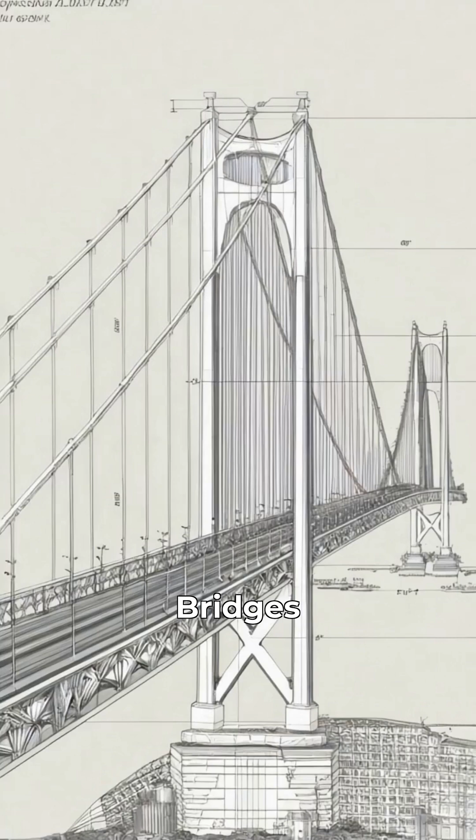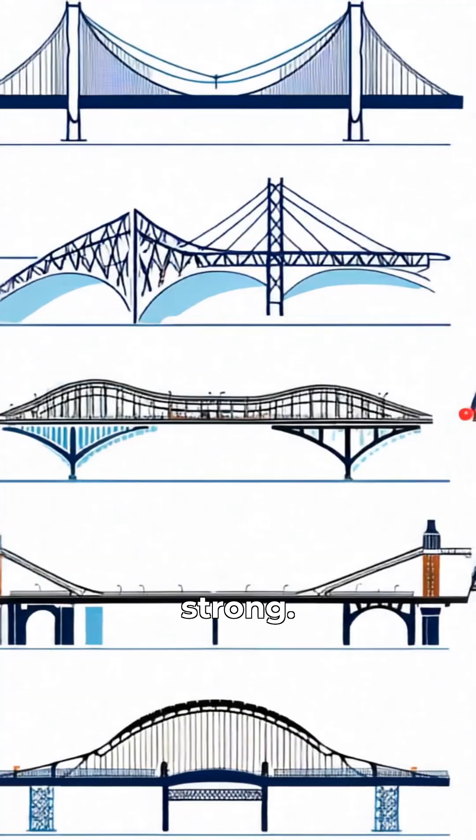Bridges help us cross rivers, valleys, and even oceans. But did you know there are many different types of bridges? Each one is designed for a specific purpose, using unique engineering techniques to stand strong. Let's take a look at the world of bridges.

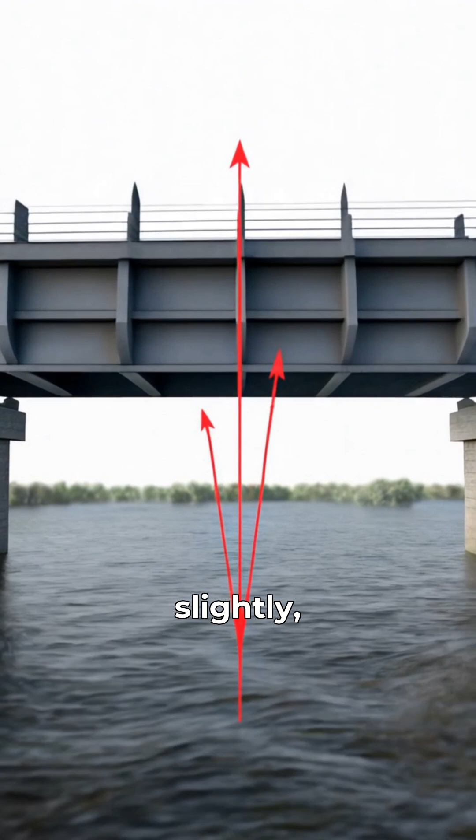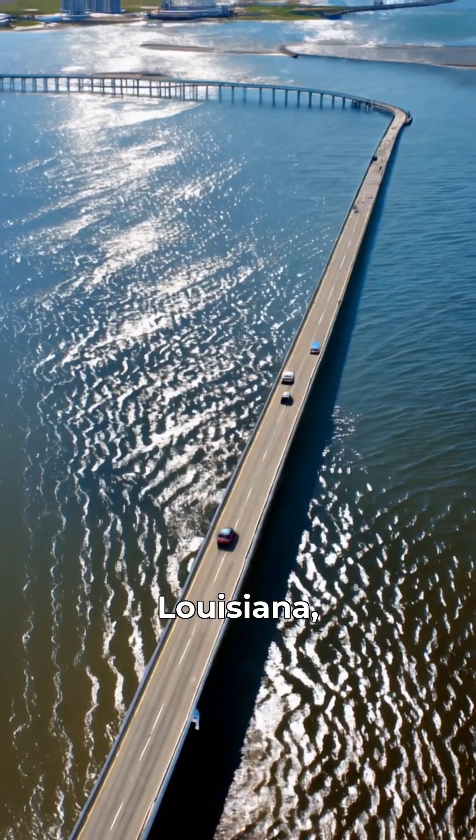The beam bridge is one of the simplest types of bridges. It's made of a horizontal beam supported at each end. When weight is applied, the beam bends slightly, distributing the load to the supports. Beam bridges are best for short spans and are commonly used for small streams or highways. An example of a beam bridge is the Lake Pontchartrain Causeway in Louisiana, which stretches for nearly 24 miles.

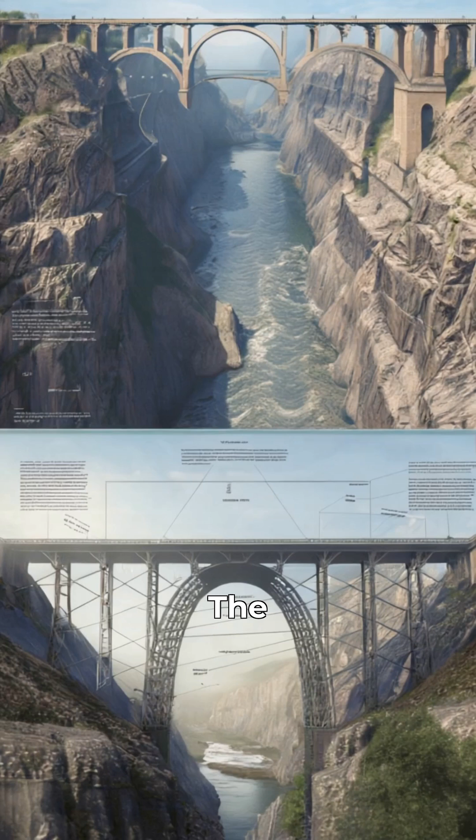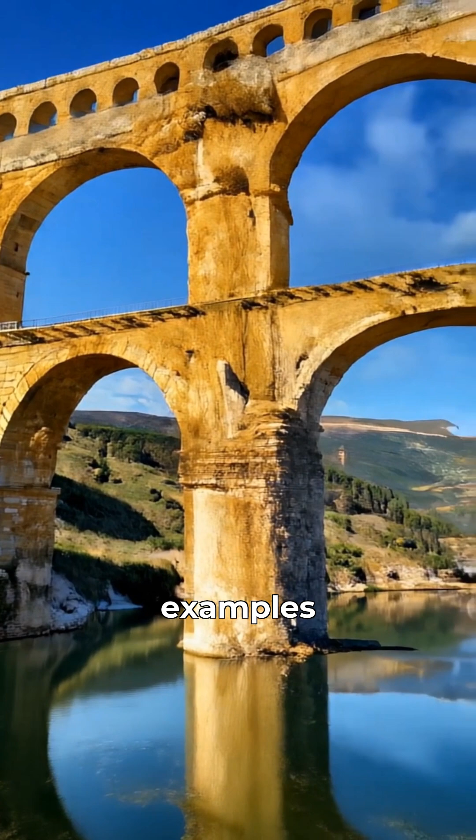Arch bridges are built with a curved arch structure that transfers the load to the supports at each end. This design allows them to handle heavy loads and span longer distances. The arch's shape is naturally strong and efficient at distributing weight, making these bridges ideal for areas with deep valleys or rivers. The Pont du Gard in France, built by the Romans, is one of the most famous examples of an ancient arch bridge still standing today.

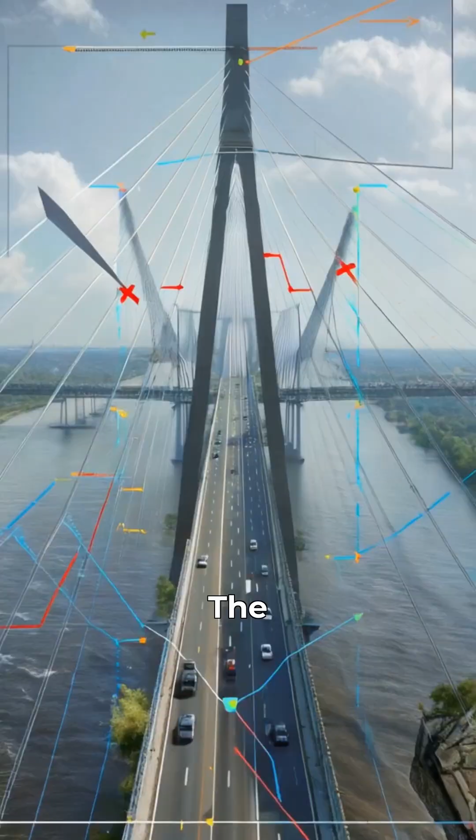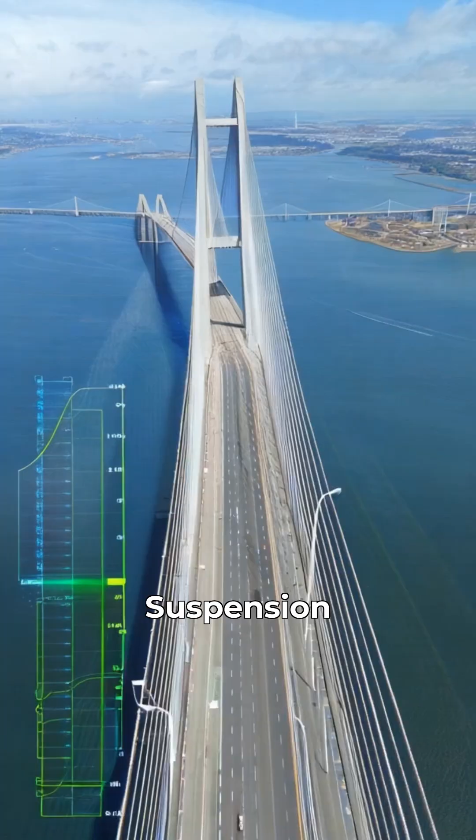Suspension bridges are designed to span very long distances by suspending the deck from large cables. The cables are anchored at each end and supported by tall towers, which allow the bridge to flex slightly under heavy loads or in high winds. Suspension bridges are perfect for long spans, often used over wide bodies of water like bays or rivers. The Golden Gate Bridge in San Francisco is one of the most famous suspension bridges in the world, spanning over 4,000 feet.

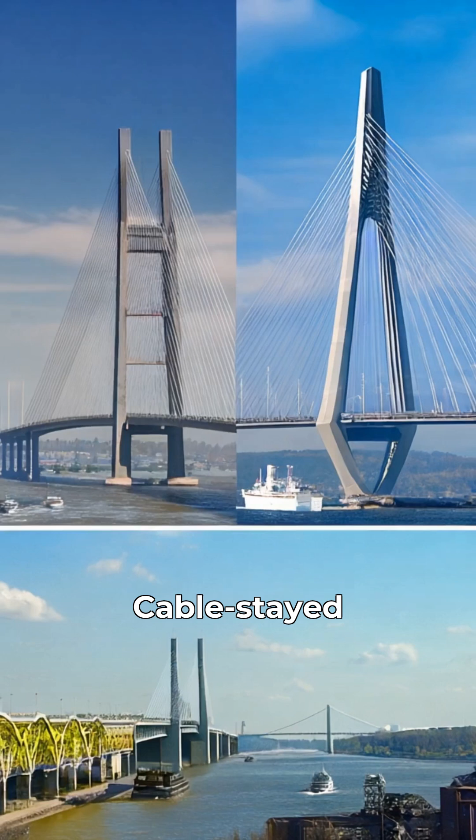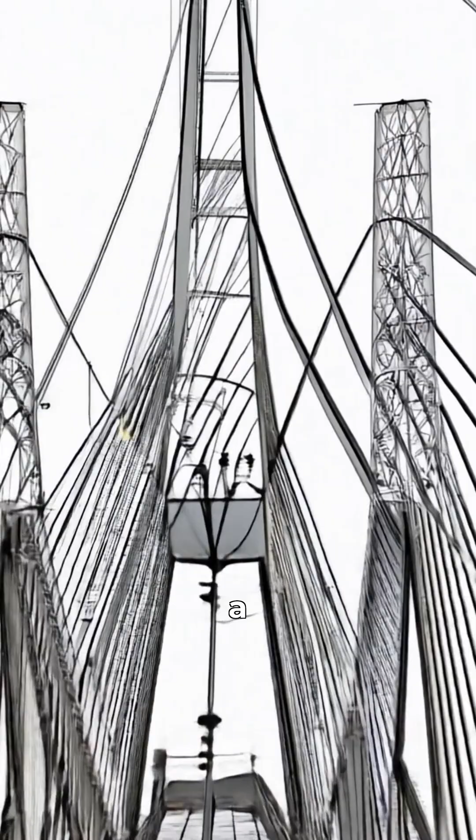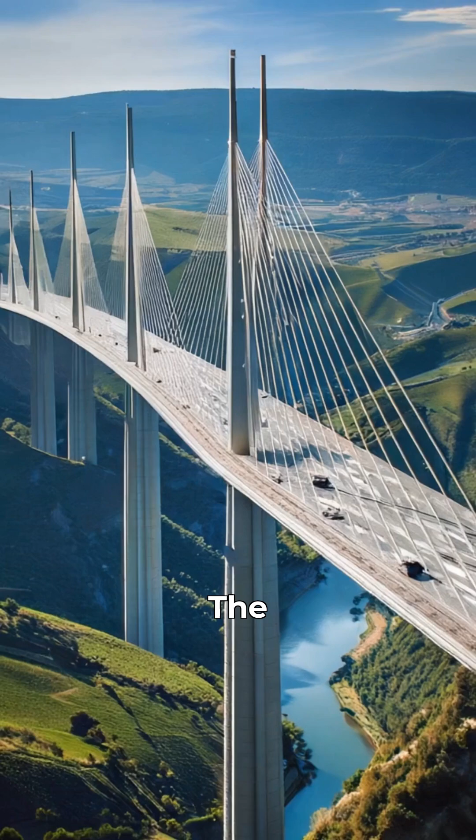Cable-stayed bridges look similar to suspension bridges but use a different design. The cables attach directly from the bridge deck to one or more towers, creating a fan or harp-like pattern. This design is very efficient and can handle heavy traffic, making cable-stayed bridges popular for both short and long spans. The Millau Viaduct in France, the tallest bridge in the world, is a stunning example of a cable-stayed bridge.

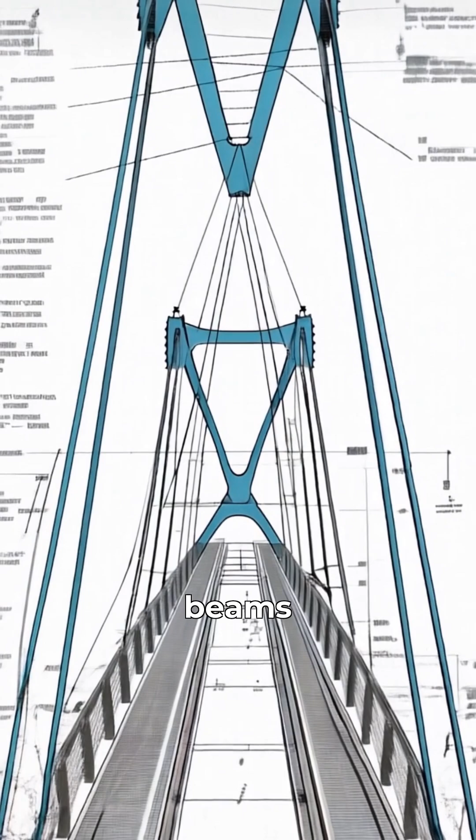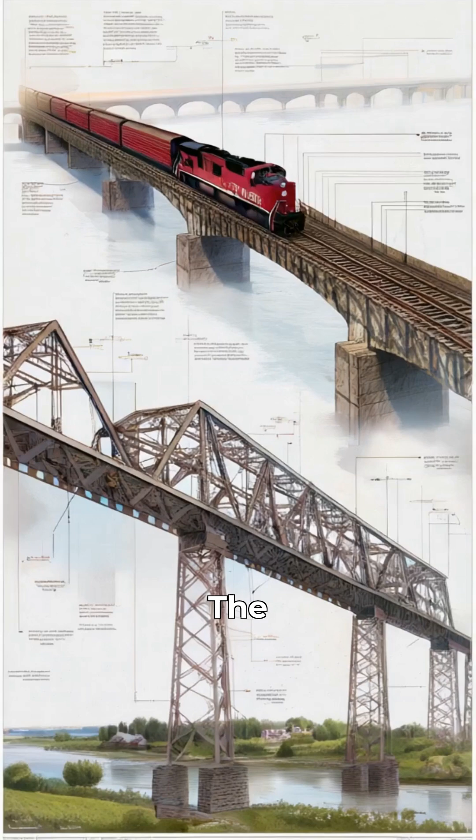Cantilever bridges are built using beams that extend out horizontally, supported only at one end. They're perfect for spans where it's difficult to place supports in the center, like over large rivers. The cantilever design can handle heavy loads, and these bridges are commonly used for railways. The Forth Bridge in Scotland, built in the 1890s, is a famous example of a cantilever bridge used for rail traffic.

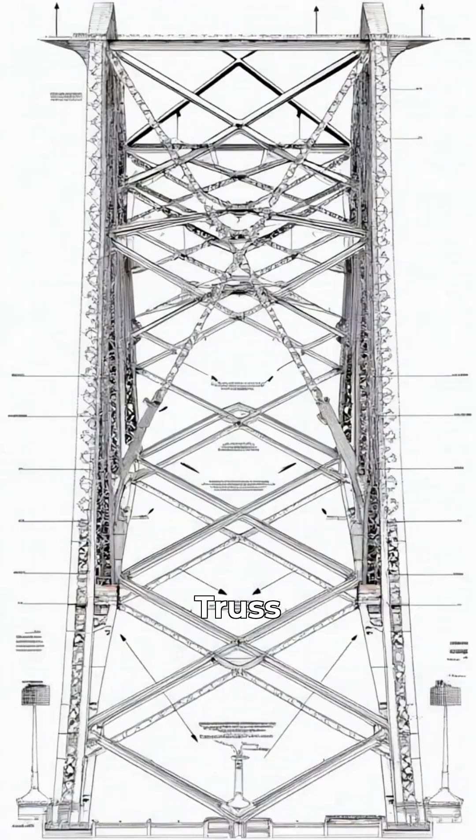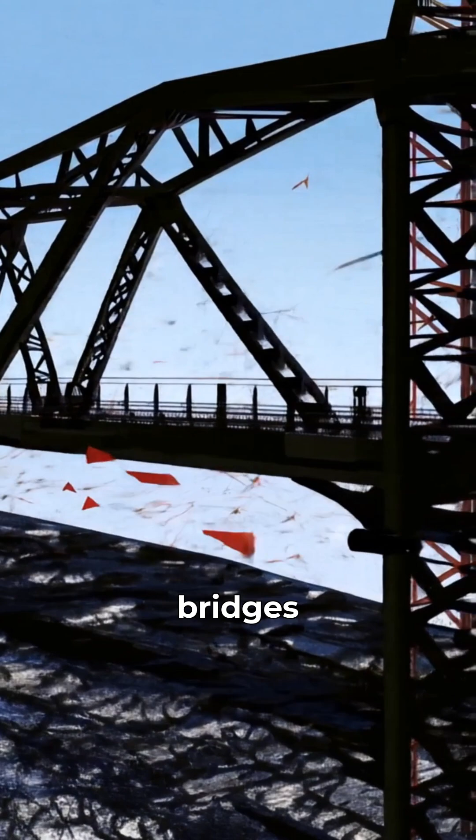Truss bridges are built using triangular shapes, which are very strong and stable. The triangles distribute the load evenly across the structure, making truss bridges ideal for handling heavy loads. Truss bridges are commonly used for trains and can span both short and long distances. The Howe truss design is a popular truss bridge structure that has been used worldwide.

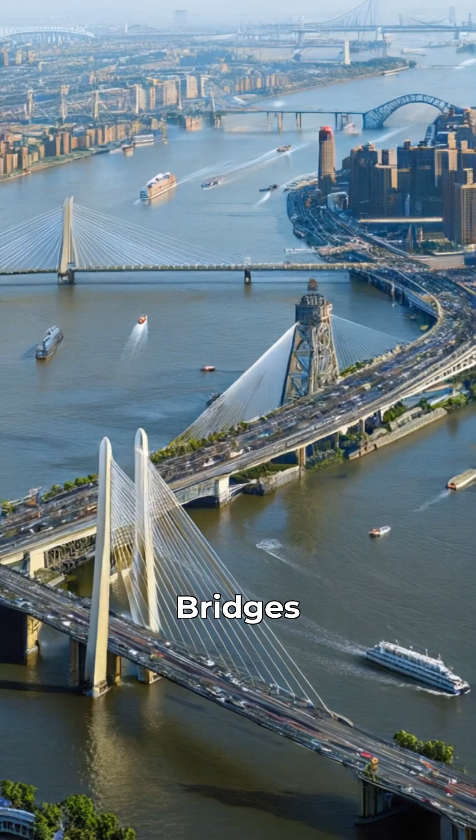Bridges come in all shapes and sizes, each one designed to meet specific challenges. Next time you see a bridge, you'll know exactly how it works and why it was built that way. Which type of bridge would you want to cross?